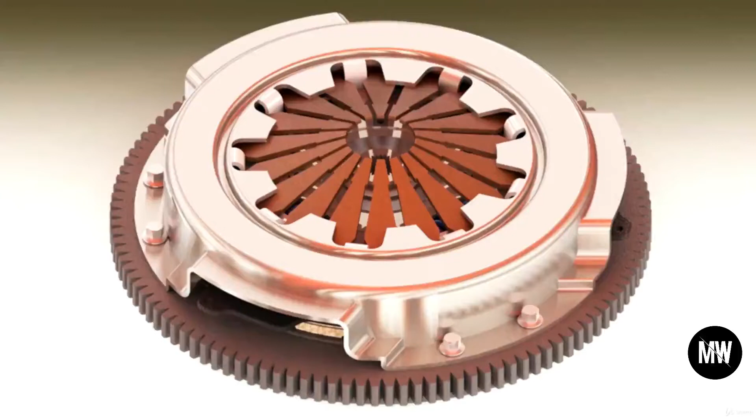This is part 3 of our clutch system, which is called the clutch cover. This is the picture of the clutch cover and this is how it looks in the clutch system. This is the final preview with SolidWorks, and let's do it. So let's begin as we always do with a new part and select the part design.

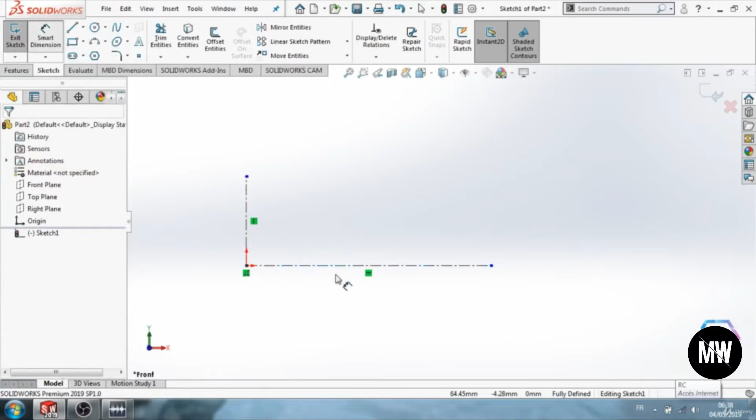I'll select the front plane and let's begin sketching. So for the sketch that we are going to use in this feature, we need two center lines. The big dimension here is 97, and let's create some lines.

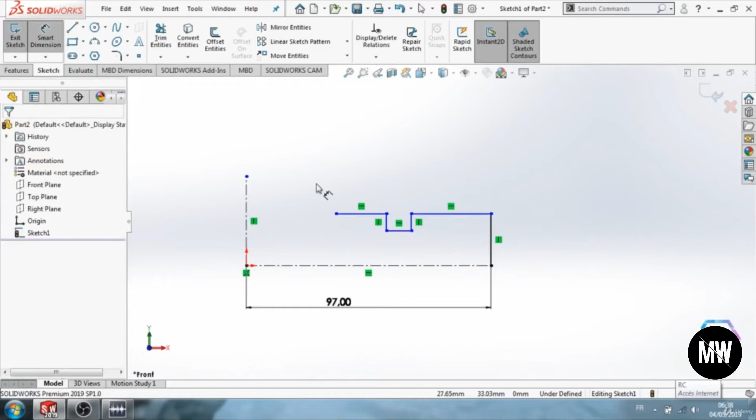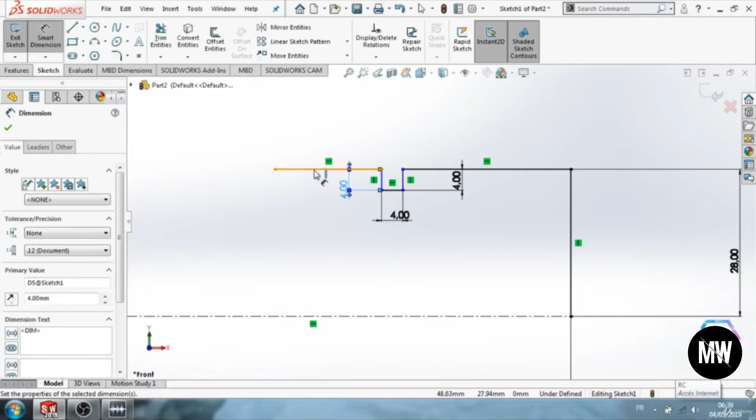Here we have 28. Here we got 4 on each side. Here we got 23.5 and here 17.5. That's it. Now I will add some sketch fillets.

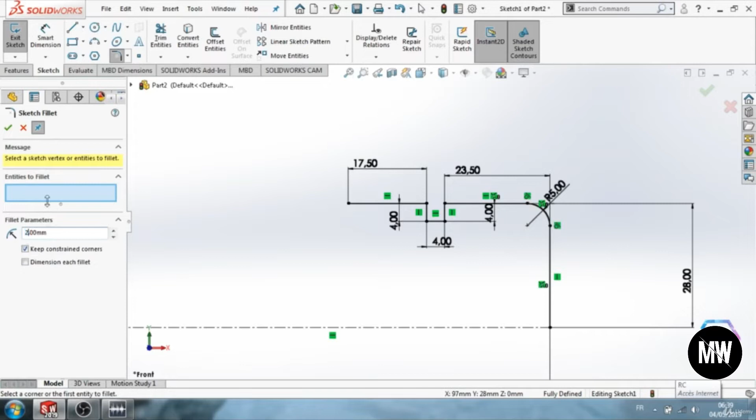The first one is 5mm radius and I'm going to select this point for it. The second one is 2mm radius, and for the selection I'm going to select this point here and this one. And the last sketch fillet is 1mm radius and the selection is these 2 points.

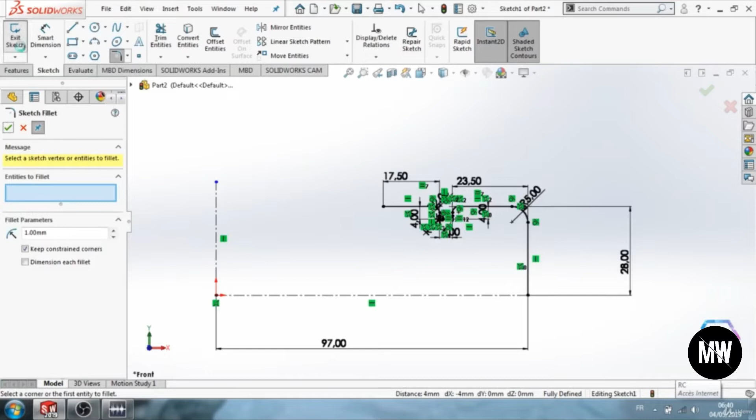Now let's exit the sketch and let's use the surface revolve. Let's go to Insert, Surface, Revolve. The axis of revolution should be this one. Good. Now let's change the view again to the front view and let's begin sketching again.

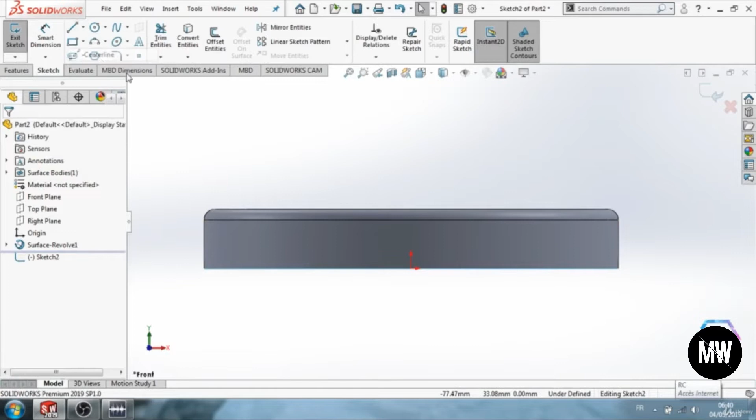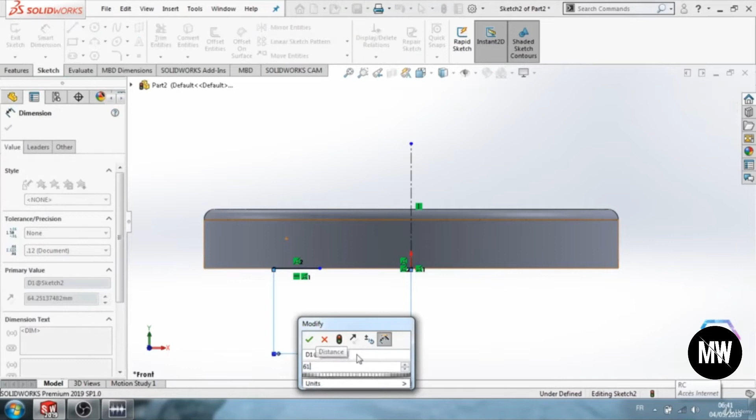Here I need a center line. So let's create some lines. Actually, let's begin with this one, and the distance between the last point and the center line is 61.5. In this line we have 5, and let's continue our lines.

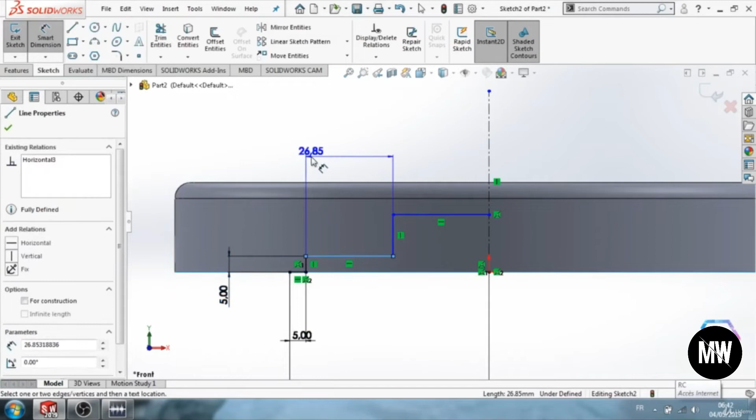Let's use some sketch fillets again. For the 1mm radius, I would select this point and this one. Let's add a 5mm radius sketch fillet, and I'm going to select this point and this one.

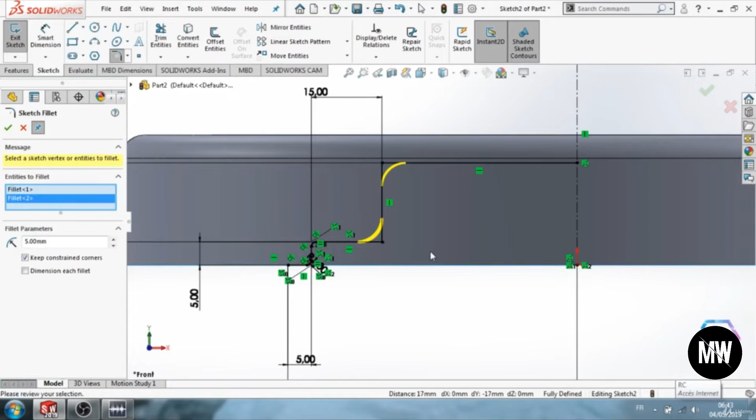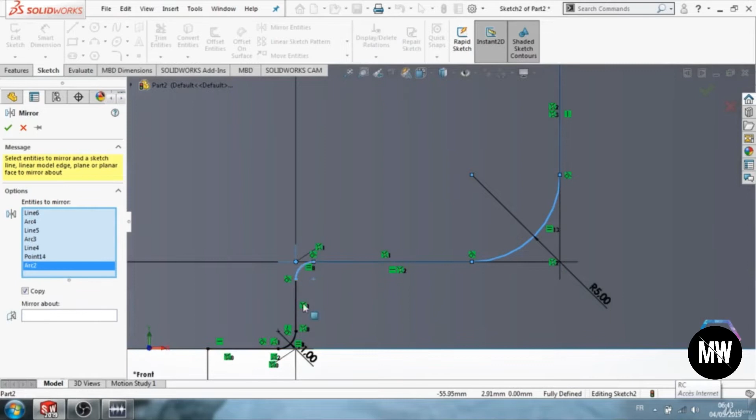Good. Now let's use the mirror to get the same form on the other side. So click on mirror entities and I'm going to select each one of these lines and arcs. And then click on mirror about and select the center line. Good. Now we can exit the sketch

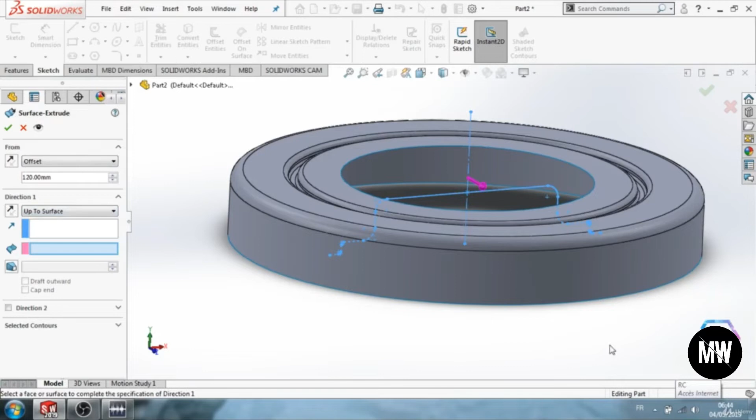and let's use the surface extrude. Let's make it from offset, and the offset value is 120. And for the direction, I will select up to surface, and I'm going to select this surface here. Click OK. Perfect. Now I want to get rid of this surface here between the surface extrude and the surface revolve.

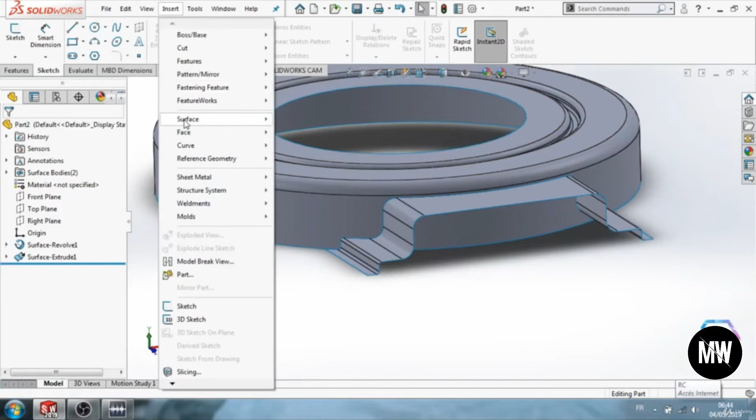So the new feature here to add is the surface trim. You can find it here on Insert, Surface, Trim. For the trim tool, I will select this boss extrude or surface extrude, and make sure you click on Remove Selections and select this surface here. Don't change anything else. And here we got the form needed on the cover.

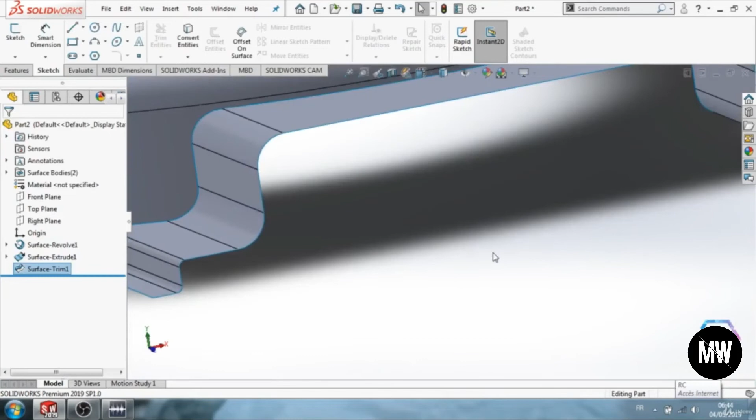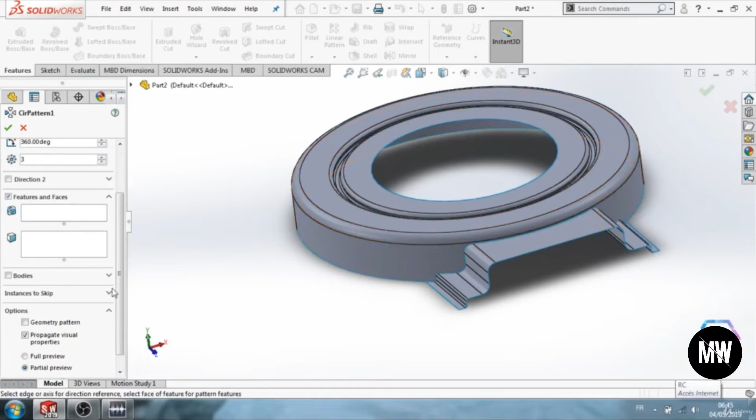Now let's use the circular pattern to get the same form 3 times around the cover. Let's go to features here, circular pattern. But this time we are not going to select features and faces because we just have surfaces. So to add a circular pattern on surfaces, you should select the bodies. And the body to select is the surface extrude. Now let's get it 3 times around the cover, and for the direction I'll select this circle.

Click OK. Good. But we still need some surface trims again to get rid of these 2 surfaces between the surface extrude and the surface revolve. So let's go to Insert, Surface, Trim, and the trim tool is this selection here. Good. It's called Circular Pattern 1. Okay. And let's remove this surface.

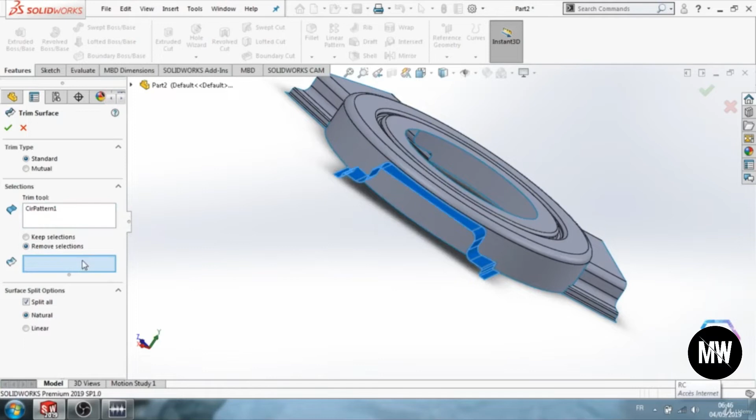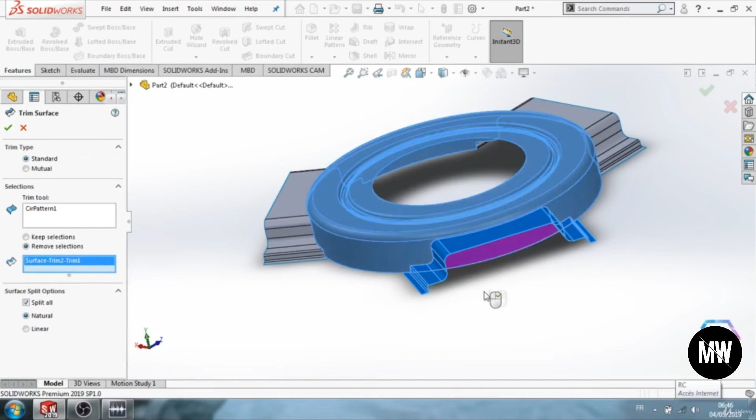Let's do the same thing again here. Insert, Surface, Trim. For the trim tool, let's delete this one and let's click on the circular pattern here, and let's remove this surface. Now click OK. Perfect.

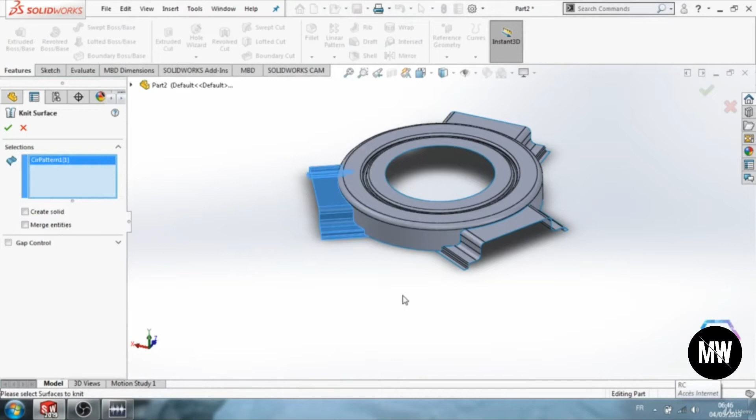Now we are going to use a new feature again, which is called the surface knit. Let's use it first and then I will explain how it works. So let's go to Surface, Knit, and for the selection I'm going to select this circular pattern here, this one, the boss extrude, and one of the 3 trims. So let's just select the last one and then click OK.

Now if we want some thickness on our cover, let's just go to Boss, Thicken, and here as you can see the only thing that you can select is the surface knit, because for the thickness we can only select one surface, we cannot select 3 surfaces. So we use the surface knit to get a relation between all the surfaces, and then we can add a thickness to all of them with one simple feature.

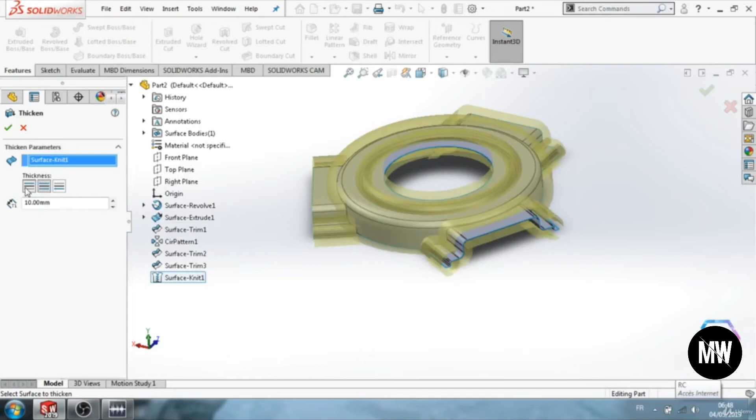For the thickness, let's make it on this side, and let's give it 2 millimeters. Click OK. And here we have the thickness on all our clutch cover.

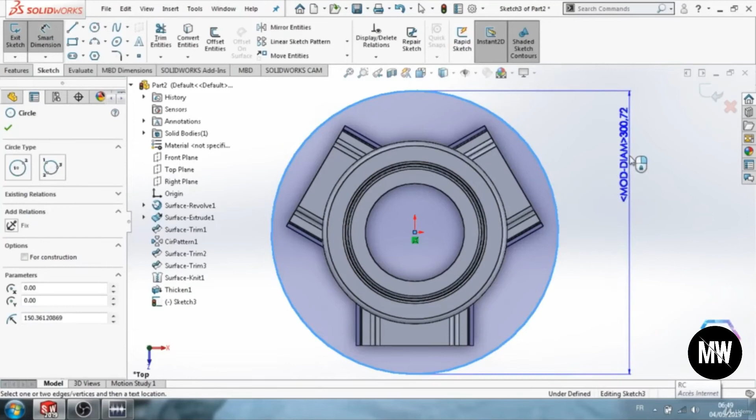Now I'm going to select the top plane, and let's begin sketching again. And let's build a circle. The diameter of the circle is 220. Let's exit the sketch. What I'm trying to do now is I want to delete everything outside of this circle to get the wavy form of the clutch cover.

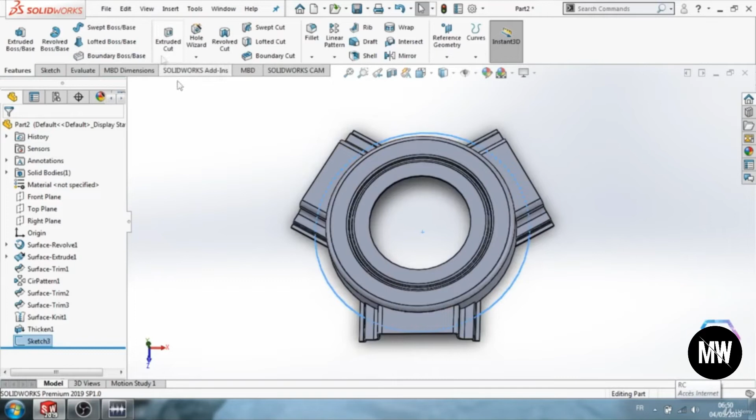So select your sketch here and go to Extruded Cut, and for the direction here I will go through both, and then I'll click on Flip Side to Cut to delete everything outside of this circle. Now click OK.

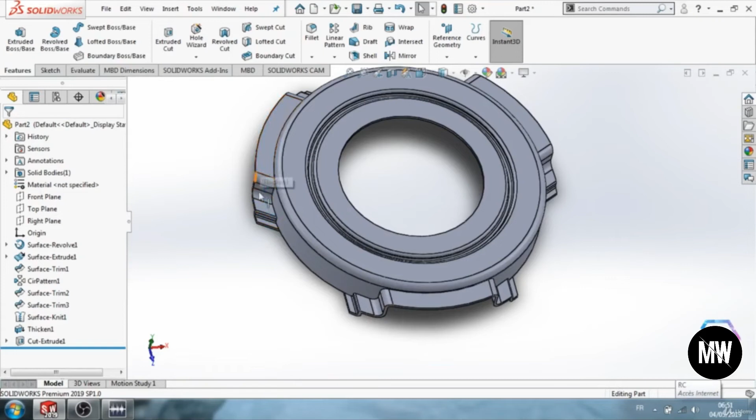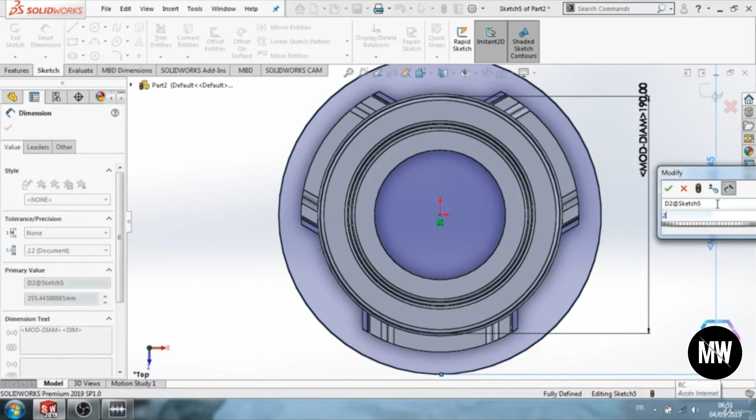Perfect. Now we need a boss extrude to complete our cover between this surface extrude and the circular pattern to complete the cover. So I'm going to select the top plane. Let's begin sketching first. First let's create 2 circles. The diameter of the first one is 190, and for the second one it's 220. Now let's add some lines.

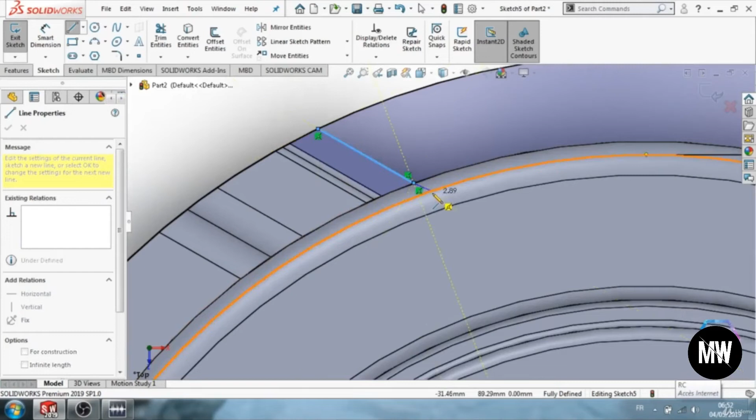I want the line to be perfectly coincident to this line, so I'm going to create this line here until this point, and then I'll finish my line until the circle with 120 diameter, and let's do the same thing around the cover.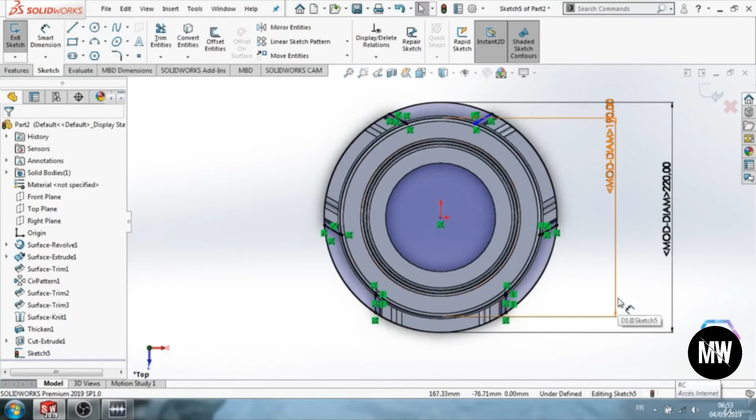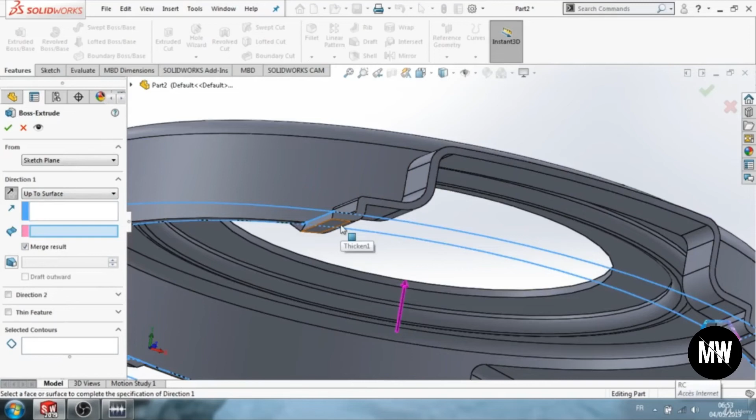Now let's exit the sketch and let's use the extruded boss. Here I will change the blind to up to surface, and surface here is this one underneath. And for the selected contours here, I'll select this one, and the last one. Now click OK, and here we completed the first form of the cover.

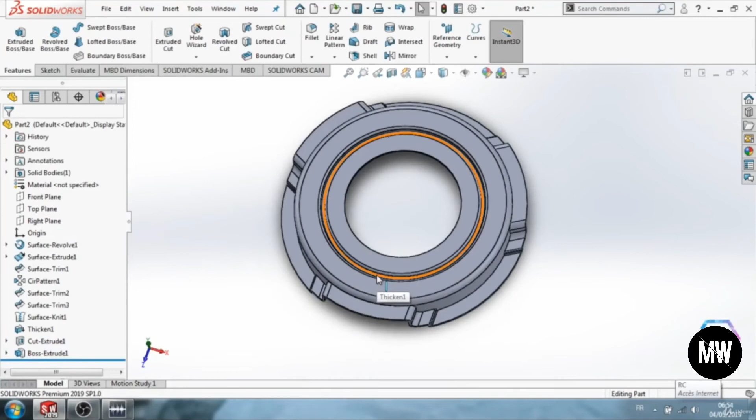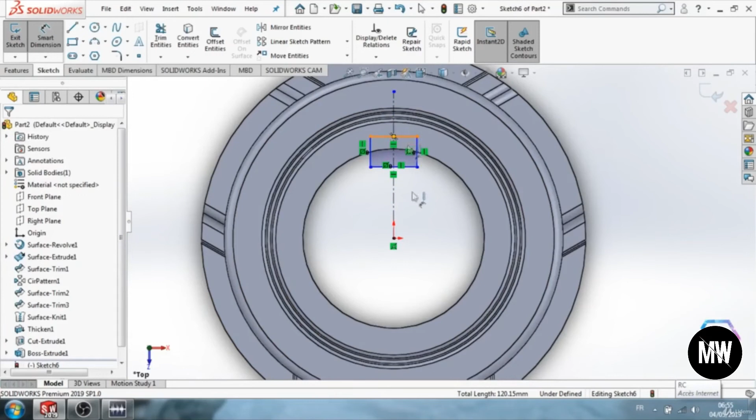Let's select the top plane again and let's begin sketching. Here I will need a rectangle and then a center line to get the symmetric relation. Click on this line, hold Control, click on this line and the center line, and let's choose the symmetric relation. Good. The distance between this line and the origin is 66.5. Here we have 23.

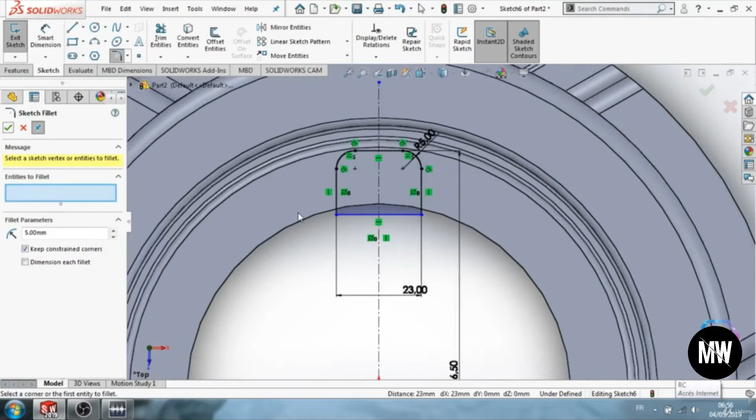And let's add some sketch fillets. The sketch fillets should be 5mm radius, and let's select this point and this one. Now let's use the circular sketch pattern to get the same form 9 times around the cover. So click on circular pattern, click here on entities to pattern, and let's select the whole form. Here for the point, make sure it is the origin, and for the instances, let's make it 9.

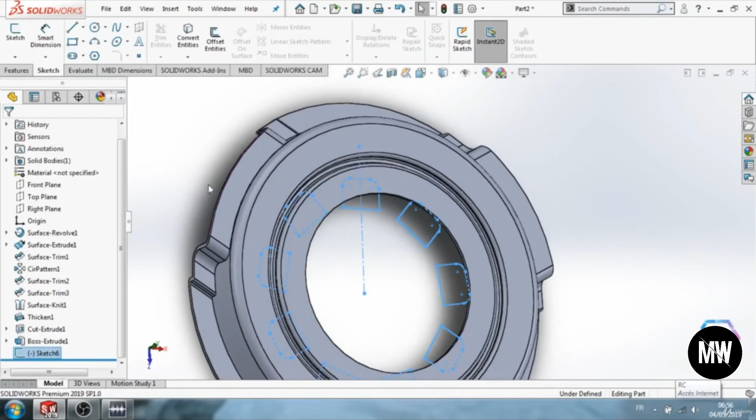Now let's exit the sketch and let's use the cut extrude and let's make it through all. Through all both. Let's select the right plane and let's begin sketching.

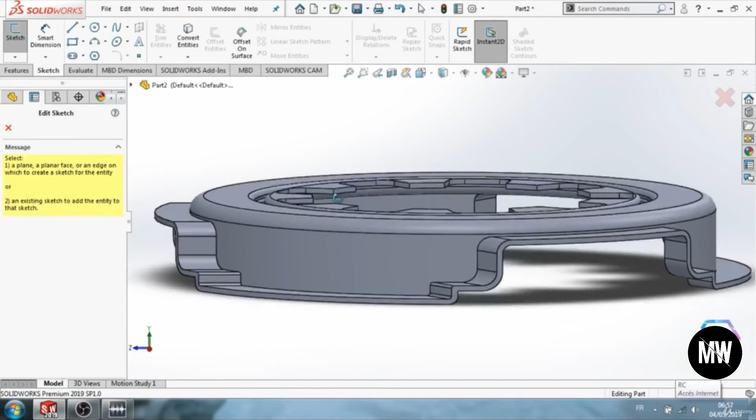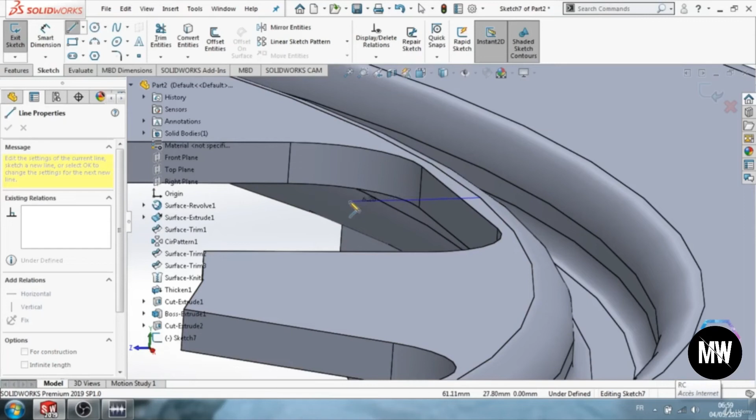So now if we click on the line here, you can see that the first selection from this side is this point here, but from this side it is this point, so I'm going to choose this side. So let's begin by creating the first line and then let's change the view. So the first point should be just here. And make sure the degree is 0.

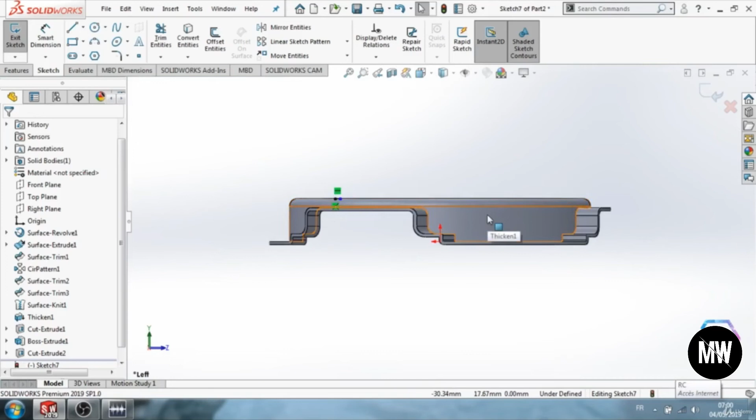Now we can go back to our right view. Let's choose the other one. Good. And here let's begin our dimensioning. Here we have 6. And let's complete by creating some lines.

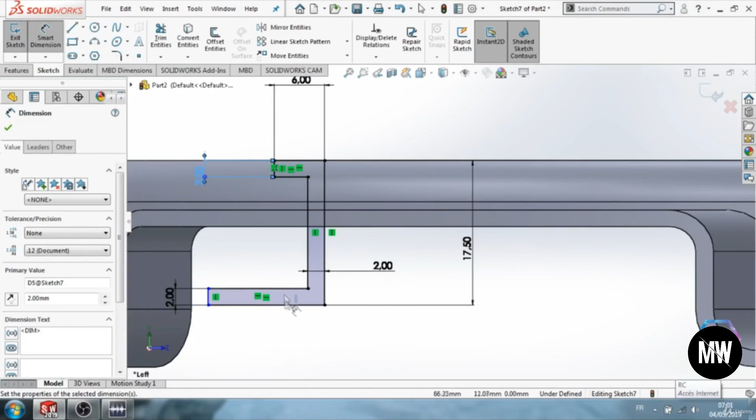That's it. Now let's add some sketch fillets. For the 5mm radius, I'm going to select this point and this one. Let's add a 3mm sketch fillet, and I'm going to select this point and this one. And the last sketch fillet is 0.5, and I'm going to select this point, this one, third, and the last one.

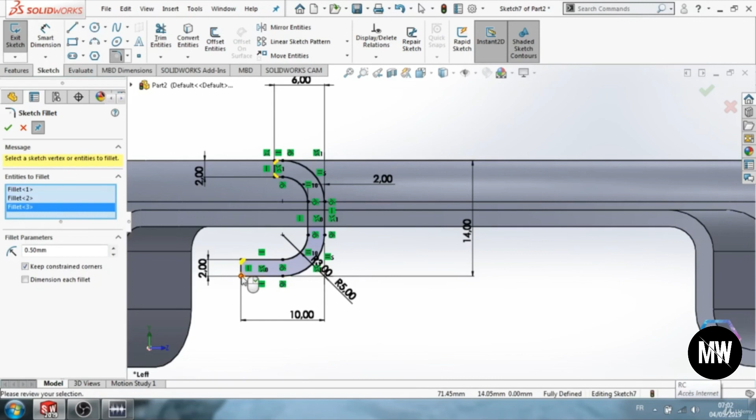Perfect. Now let's exit the sketch and let's use the boss extrude, and let's change blind to mid-plane, and let's keep it on 10mm. Click OK.

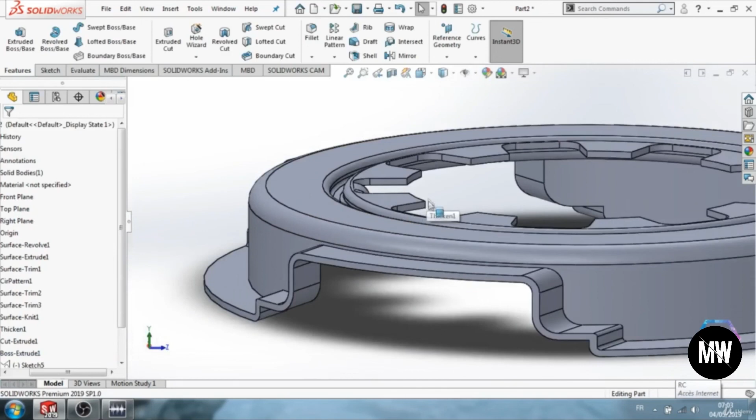Perfect. Now let's use circular pattern to get the same form 3 times around the cover. So click on the circular pattern here. The feature to select is this boss extrude, so let's open up this one. Click on the boss extrude. The number of instances should be 3, and for the direction I'm going to select this edge. Let's make it 3 times, I'm sorry.